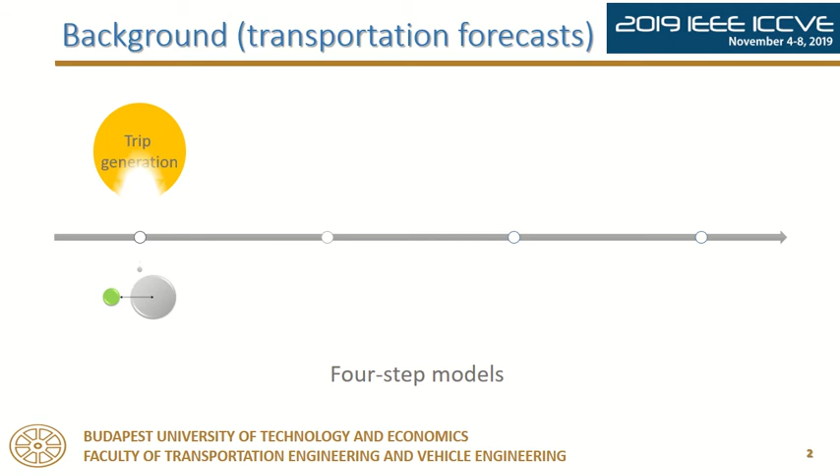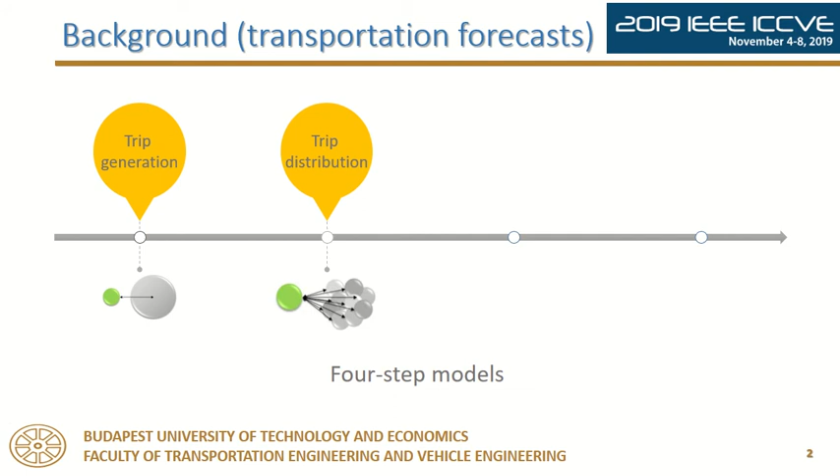Trip generation determines the frequency of origin and destination of trips in each zone by trip purpose. Trip distribution matches origins with destinations. Mode choice computes the proportion of trips between each origin and destination that use a particular transportation mode. Route assignment allocates the trips between an origin and destination by a particular mode to a route.

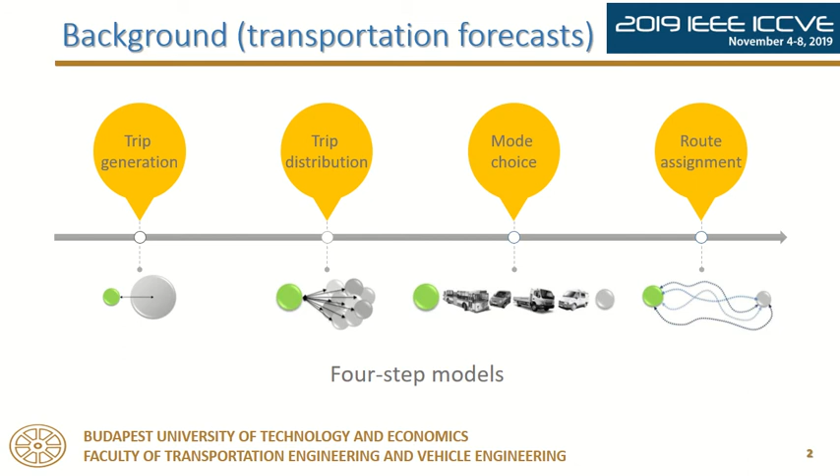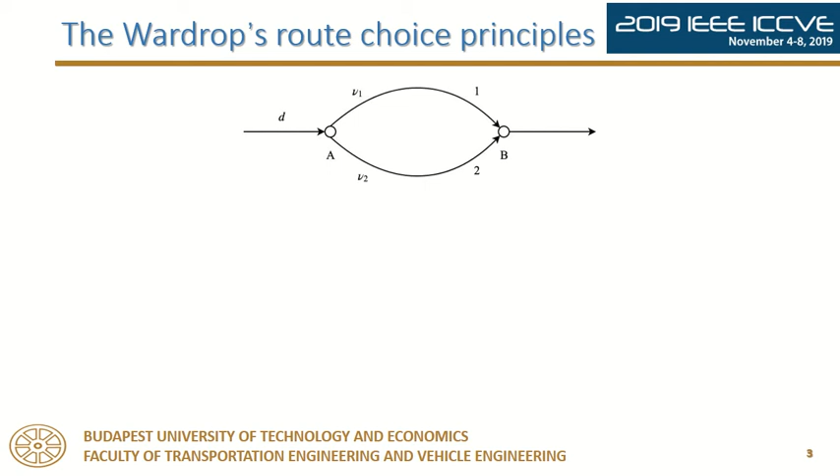Often, Wardrop's principle of user equilibrium is applied. What are Wardrop's principles? Let's take a simple example. In this two-route map, the vehicle should travel from A to B. There are two ways to determine which way to take. First is the user optimum principle. In this case, the journey times in all routes actually used are equal, and it can be expressed in a mathematical way as this.

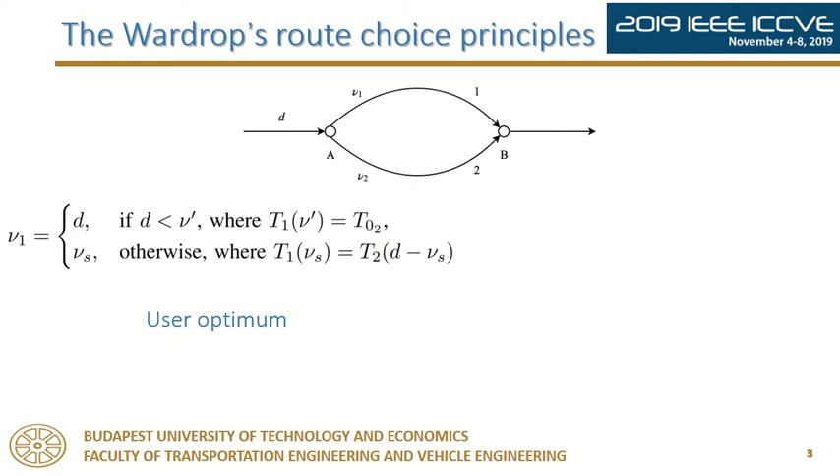In this formula, it is assumed that the free flow travel time on route 1 is less than the free flow travel time on route 2. When the demand is less than ν′, all vehicles take route 1. When the demand is bigger than ν′, the route assignment will make sure that the travel times on both routes are equal. Another principle is the so-called system optimum principle, which makes sure the average journey time is at a minimum.

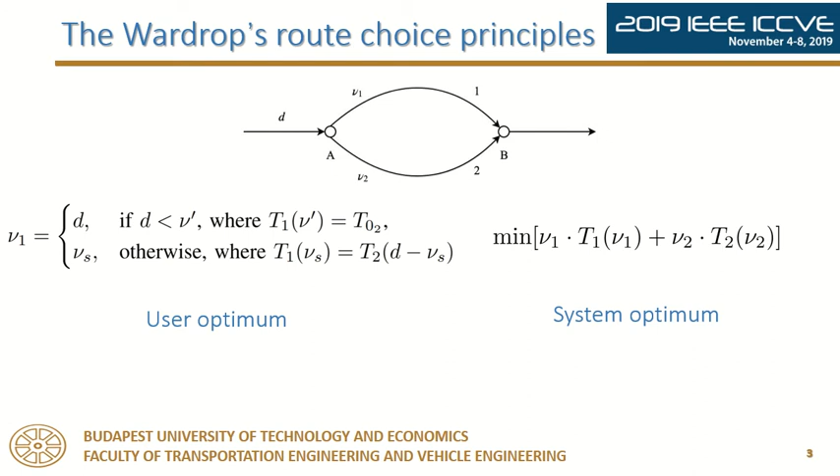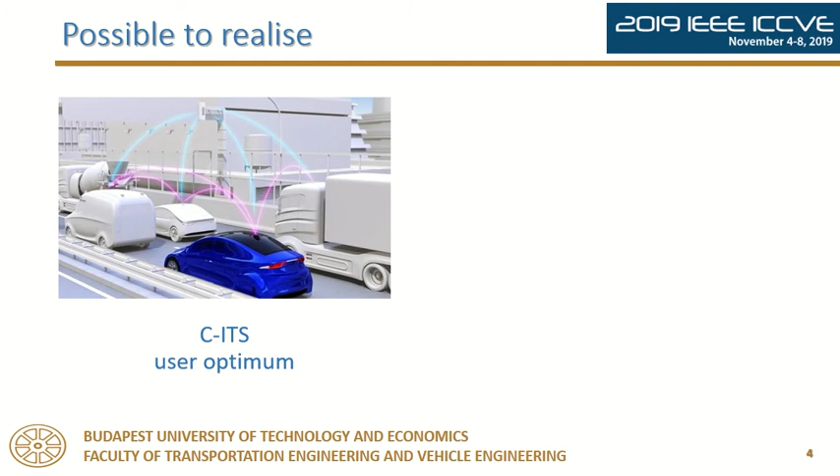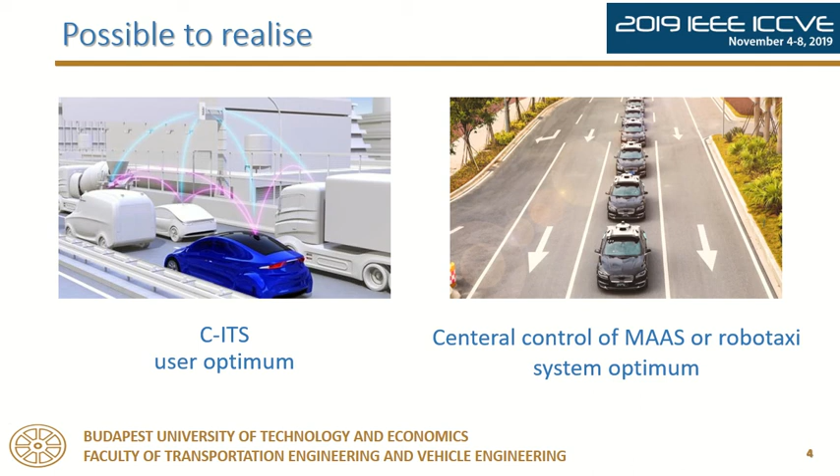As we all know, with the development of information technology, the connected intelligent transportation system makes the user optimum possible because the driver can get the traffic information on the routes. They can take the fast way to their destination, while the system optimum is not that well studied. But the spread of mobility as a service and the robot taxi makes the central control of route assignment possible. Besides, congestion pricing is also a way to realize the system optimum principle.

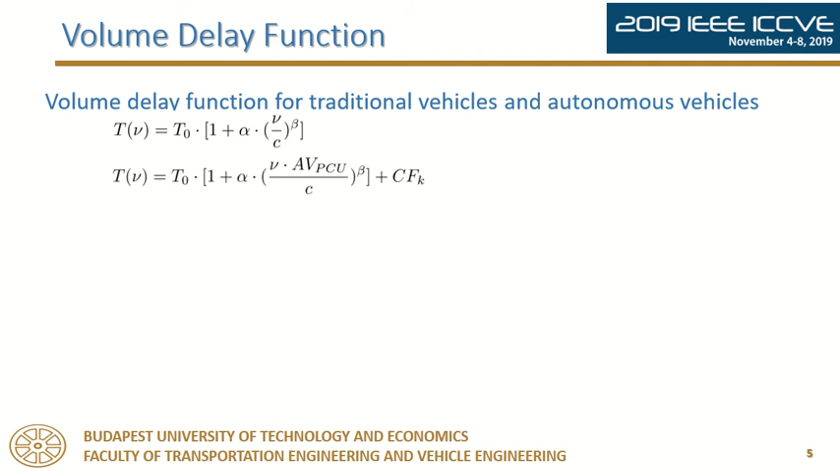In this work, the parameters are chosen as follows. The curves of these two formulas are shown in the picture. The x-axis is for the demand, the y-axis for the travel time, and the cross point is the equilibrium point for the user optimum principle. What happens when it comes to the system optimum? The split will be earlier.

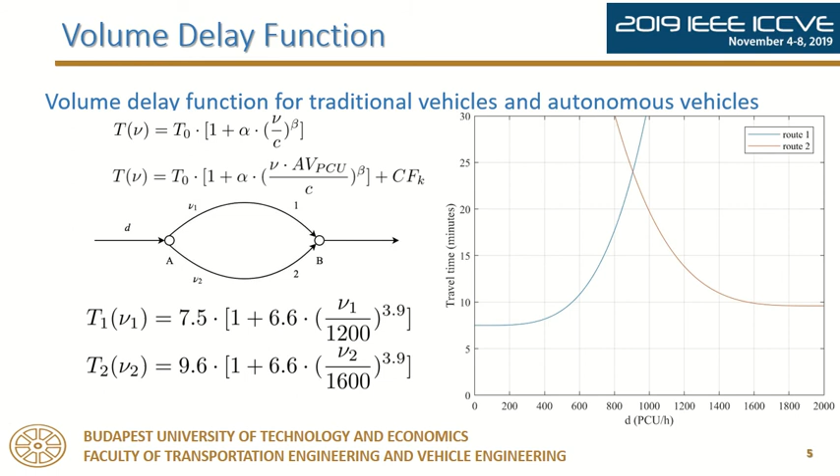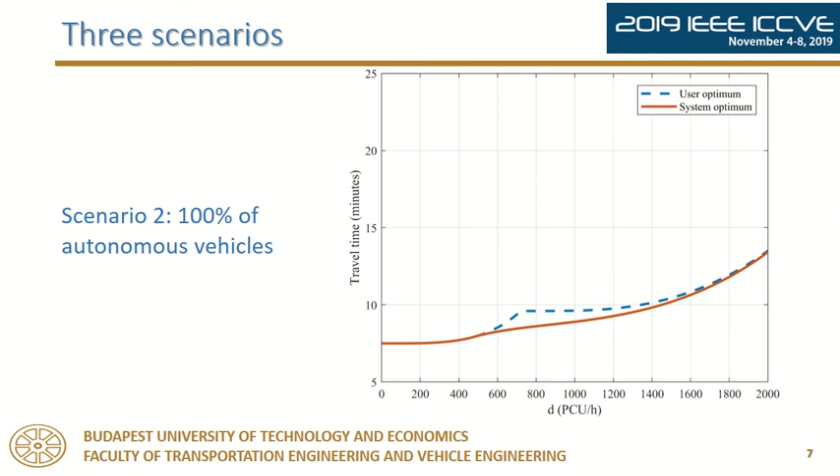Let's have a look at the calculation results of 3 scenarios in the paper. When demand is low and high, there's little difference between these two principles. The system shows its advantage when it comes to medium demand, which is also very common in reality. The next scenario is for pure autonomous vehicles. The travel time becomes less and the difference range prolongs. The third scenario is when we set the free flow travel times equal. The two principles show no difference at all.

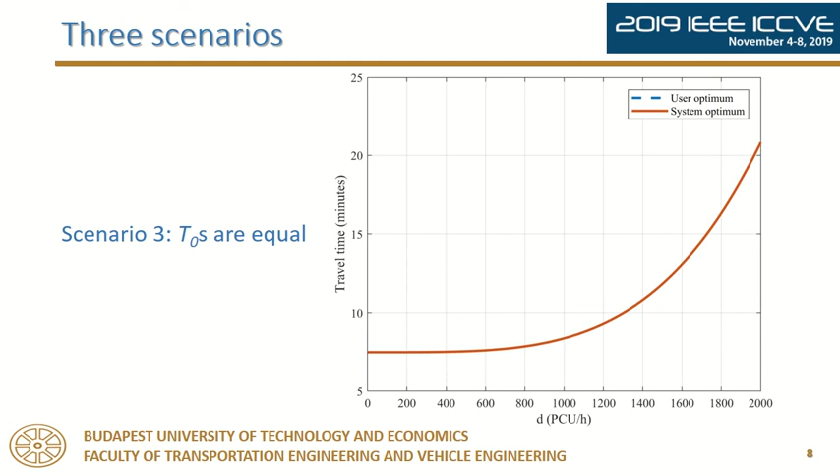In order to make the difference clear, the travel time difference between the two principles in 3 scenarios is drawn in one picture. As you can see, the travel time difference of autonomous vehicles appears later and is prolonged compared to that of traditional vehicles. And the max difference is around 1 minute, which is around 10% of the travel time.

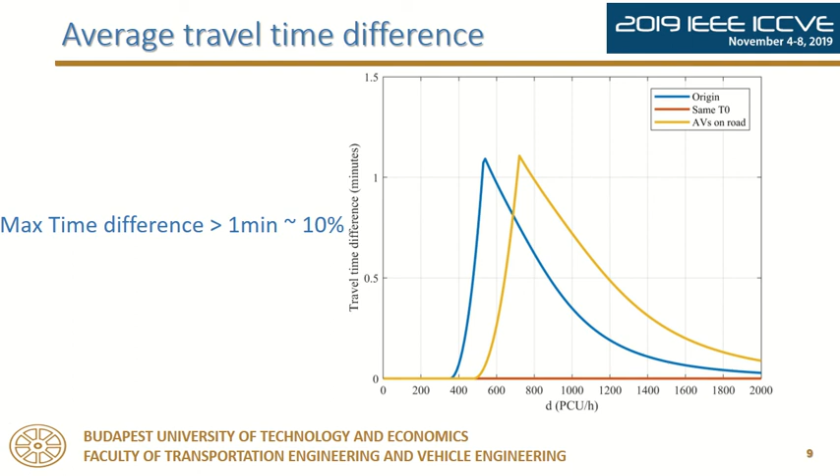In addition, the sensitivity analysis on road capacity is investigated. As we can see in the diagram, with the increase of capacity of Route 1, the difference range and slope become wider and gentler. The maximum travel time difference shows a decreasing trend, but almost keeps the same.

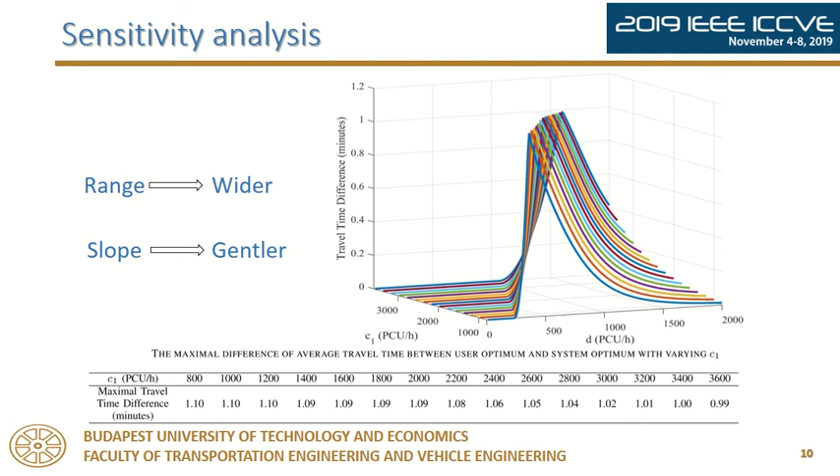There are 4 findings in this work. The system optimum principle makes the transportation system perform better in terms of average travel time. Wardrop's 2 principles are equivalent if the network has the same free flow travel time on each route. The autonomous vehicle fleet running in the traffic system will dramatically drop the average travel time on both routes. The increase in capacity enlarges the difference between the user optimum and the system optimum by prolonging the difference range and slope.

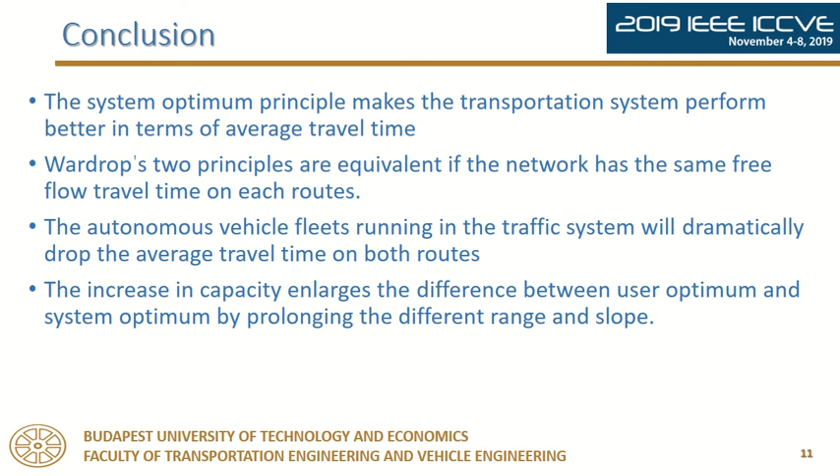In the future, a more complex road network will be used, and we are also going to try to obtain the system optimum by congestion pricing.